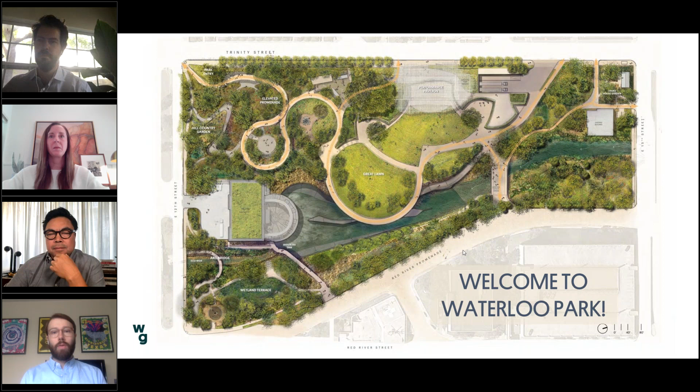It has a wide range of amenities in addition to hosting events, obviously. The park will include gardens, playscapes, an amphitheater with a capacity of up to 5,000, and other more immersive natural experiences, along with about a mile of trails.

It also gives you a sense of how centrally located this is. The capacity for the largest events would be up to 5,000, so a pretty substantial event or gathering could happen in this space. We look at this as an opportunity for a wide range of events, from contemporary music shows to ballet and arts, as well as gatherings like runs or other events.

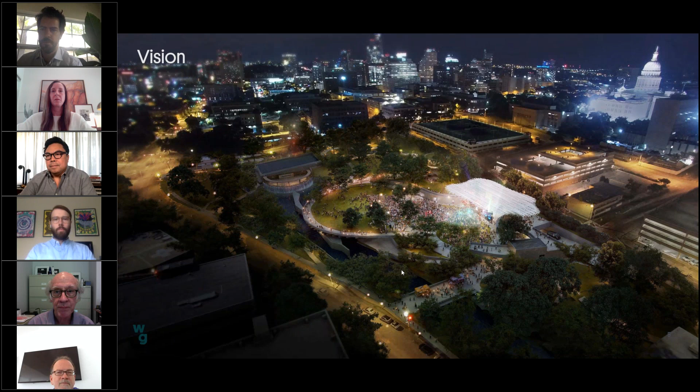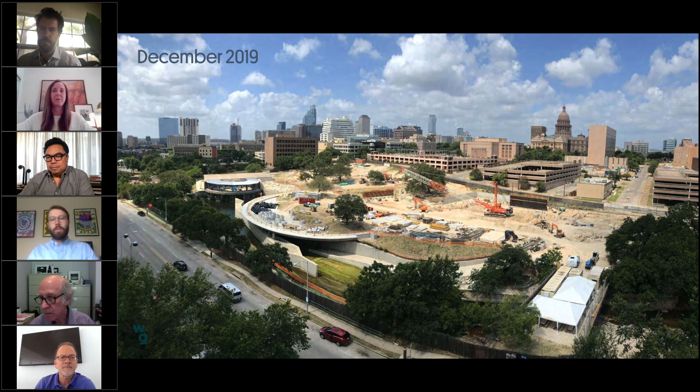One of the things we tried to do is build in permanent infrastructure to support the events, activities, and family uses of the park. The family pavilion is one of those structures. The others are these concrete buildings you see here.

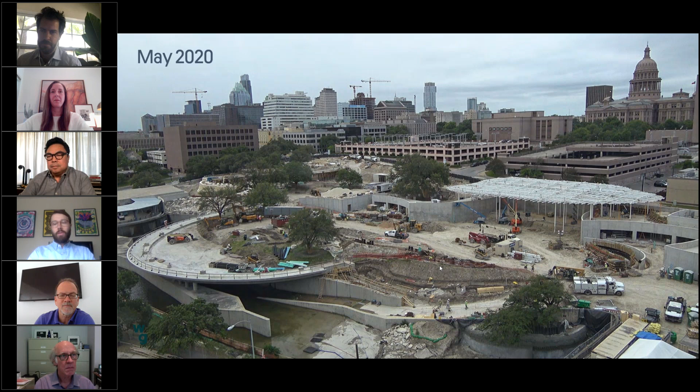One of the goals is to make those buildings really integrate with the landscape. In the case of the building you're looking at here, a lot of the facilities are underground with green roofs on them, and you really experience them as these beautiful curved walls. That'll have restrooms and concessions to support the larger events, and those can be closed off during non-event times. You also see, again, that central location with the Capitol and the city just in the background there.

Next, please. All right, I'm going to walk y'all through some aerial photos of the site and set some context for the family pavilion presentation. We'll quickly take a drone's eye view around the site and show you all the latest. Next, please.

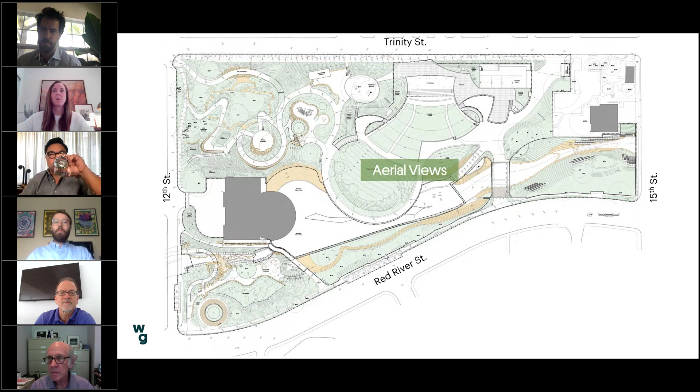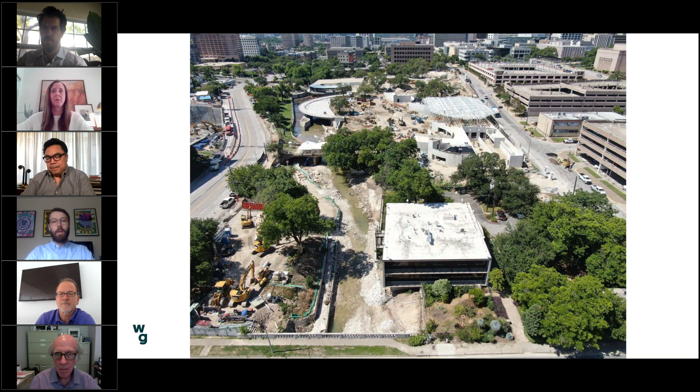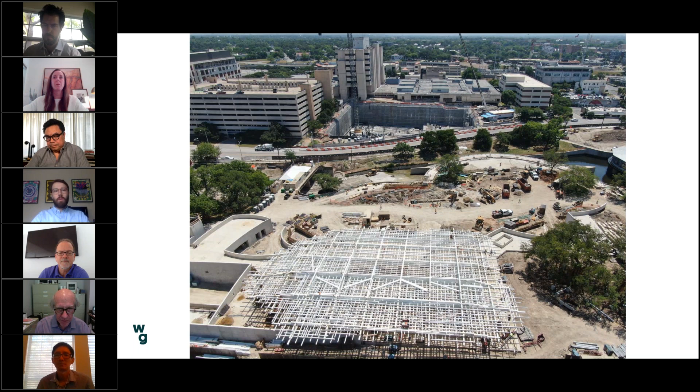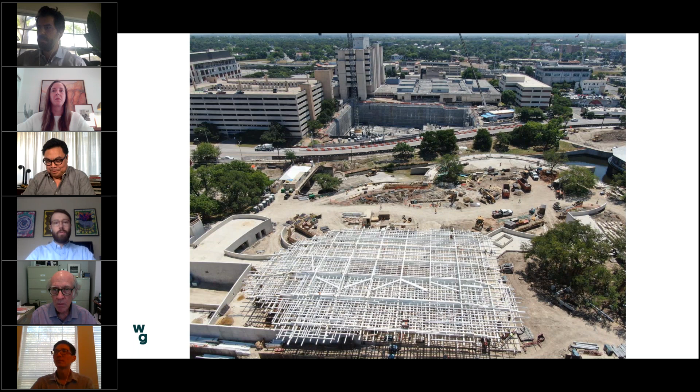Here's a view over top of the amphitheater looking out towards the Great Lawn. We've got about 5 miles of steel in the roof of that structure, and you can see all those layers which create that shade. There'll also be a rain protection layer, which keeps performers and attendees dry during a show. But during regular park use, that'll be a space where park goers can walk up on stage, hang out, maybe sit at some cafe tables, and use that beautiful shade canopy.

You can also see the development happening all around us. Just across the way, you can see the redevelopment of Central Health and the Innovation Zone.

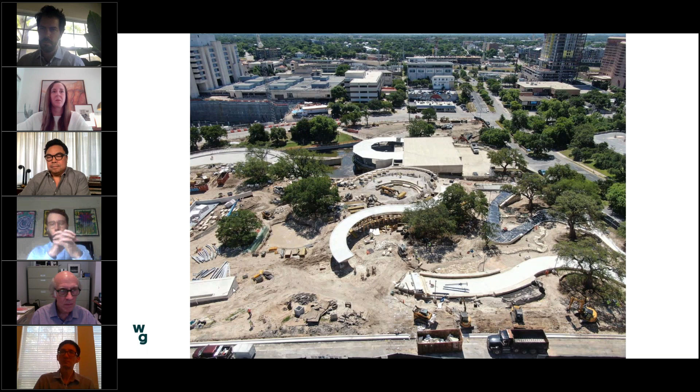This next view is looking from the southwest corner out across the park. Again, the trail curves through the park, with the Family Pavilion in the top left, in the canopy in the background. I like this shot a lot because it shows the beautiful heritage trees we have on site that we worked around with the design.

It's a key feature for us. We relocated 4, soon to be 5 heritage trees on site. One of the real benefits is we have this great day-one shade - we don't have to wait 15, 20 years for trees to grow for people to experience beautiful shade. So we built a lot of seating areas, trails, and other spaces which really benefit from shade in and around these beautiful trees.

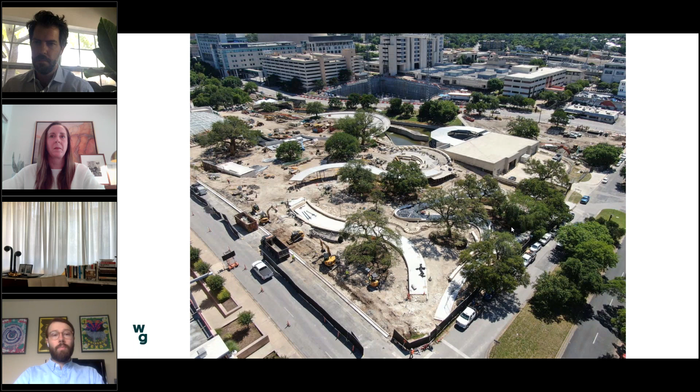Perhaps the 2 most beautiful trees on site are right adjacent to the Family Pavilion. We'll be talking a lot more about the design and how those trees work well with the design of the building over there, but those are some of the best trees on the property.

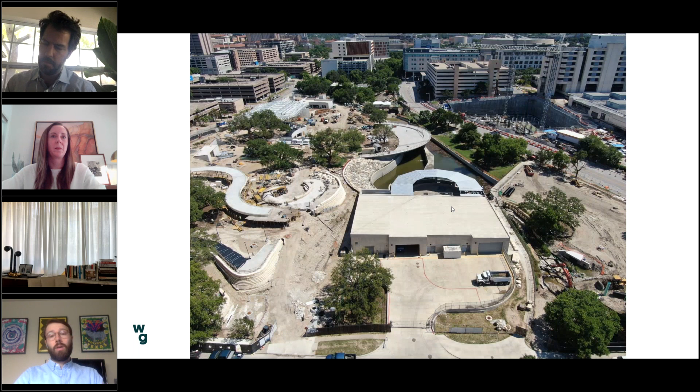Another one of the distinguishing features on site - this is looking from 12th Street north. You can see the medical school and UT off in the distance, but we have this large piece of tunnel infrastructure, the tunnel inlet facility. Any of y'all who attended our presentation last week got a lot of really great in-depth information about how the tunnel functions and operates and what it does to benefit the overall Waterloo Greenway Park system. This is sort of the central facility for that tunnel, and it's key in the center of the park - we've designed around that a lot. I think there'll be some really cool opportunities as the park opens to engage and learn about the great function and benefit it provides for the park system and our community as a whole.

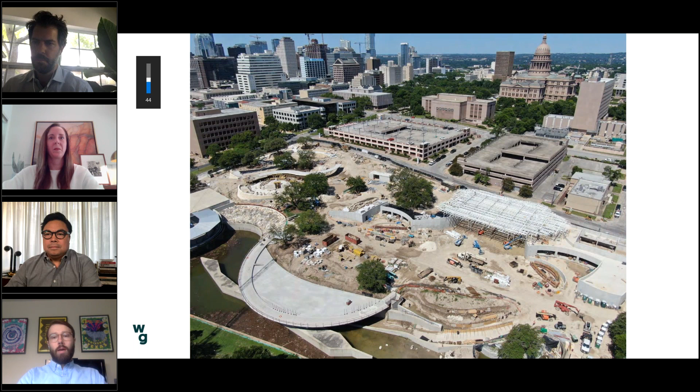And that moves us to today's focus, which is the Family Pavilion. So two of the trees that I mentioned are these beautiful existing heritage oak trees that have been in the park for generations, and before that as it was a neighborhood. Those exist right in the center of the park on the west side.

When MVVA, Michael Van Valkenburgh and Associates, was designing this park, this was seen as a real opportunity to utilize the shade around those trees to provide places for people to sit, relax, eat, and enjoy the park. With that idea in mind, we worked with Michael Hsu, Office of Architecture, to design this great concept of the family pavilion in this location roughly highlighted in blue here, which will serve a number of key features for the park at all hours of operation and be a great companion to the garden spaces, the amphitheater spaces, and other items I mentioned, including a playscape.

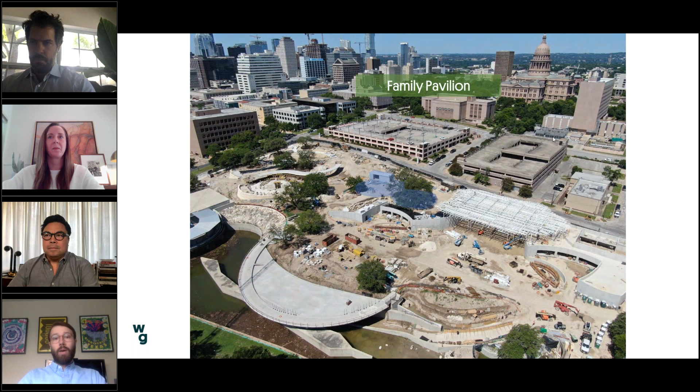And so with that, to talk in much greater depth about the family pavilion, I'll pass it off to Michael.

Thanks so much, John, for that primer and introduction. This has been an incredible job for us, and we're so proud to be working with you guys and collaborating with MVVA on the entire project. With me today I have Maija Kreishman, the managing partner of our office, and also Andrew Bell, senior associate and project lead for us. Andrew's been doing an incredible job making sure the project gets built out. We can go to the next slide.

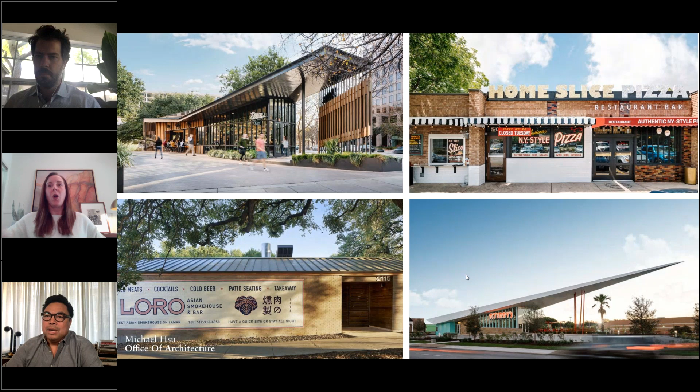I wanted to start by talking about our inspiration, where our hearts and minds were at on this job. But before I do that, I wanted to give a quick introduction to our office. We're Austin homegrown, about 50 architects and interior designers, and you may know some of our jobs, like the ones on the screen. There you have Home Slice, Loro, and P. Terry's. Those are some of the places you may know around town, but we've also completed projects like the South Congress Hotel, the Line Hotel, and Fairground downtown. We're big believers in placemaking and designing for a memorable and sticky experience. So that's why this project for the family pavilion was such an enticing job for us.

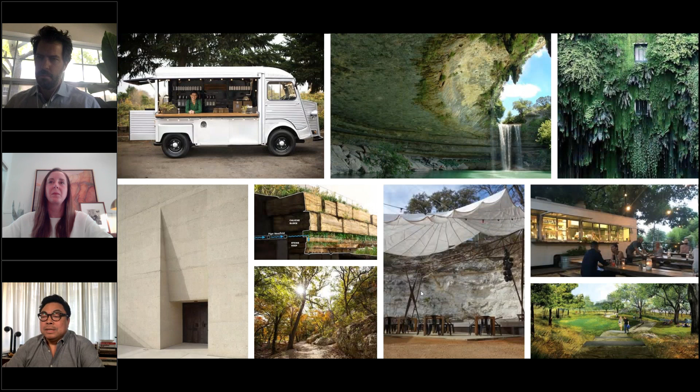So moving on to inspiration. What we love about nature, especially Central Texas nature and its topography and geology, is a contrast of experiences. So you have this classic photo of Hamilton Pool. And the way we're reading this photograph is we love the idea of materials that are very solid, really grounded, contrasted with the softness and texture and changing scenery of vegetation. So this project is really about those two things working in unison.

And we also love some of these images where really hard, heavy materials like limestone, or in our case concrete, were thought about and designed in a way to where they could almost float, because we love the idea of light coming through those two things as a screen and making for a really interesting experience. It was also the job of this building not to overexert itself, so we didn't want it to be over-designed. The park is beautiful. It's really about gathering and reconnecting with nature and less about architecture that's a little bit overdone.

So I hope you'll see that the building is meant to be quite subtle, with lots of interesting nods to how we bring light into it, so these contrasting experiences and textures will render in the final product when all the landscaping is grown over the building. It was really meant to tuck into the hillside and be a supporting cast member as opposed to being front and center.

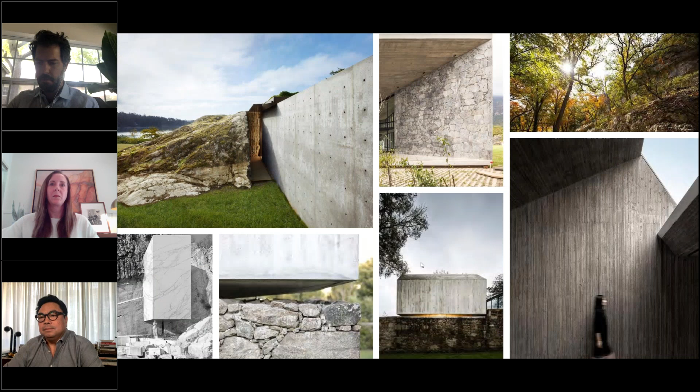Here you get some inspiration images of those contrasting things we were talking about, how the natural stone of the site versus the more man-made elements of the cast-in-place concrete, with the vegetation, and then having the sun really put it all into play as the catalyst. These are the things that inspired us for the job, and these are the experiences we hope to build in.

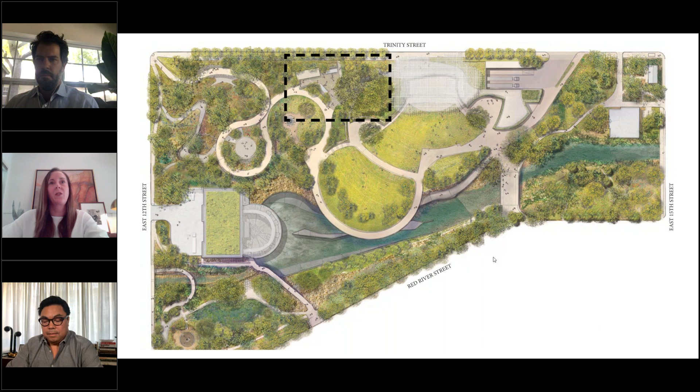We have what might be considered a small part of the project, but one that I hope is doing a really big service to the project. As John oriented you, the Family Pavilion sits just off of one of the main entries off of Trinity Street, right next to two of, I think, the most beautiful trees on site.

Its real intention here was to serve that accessibility goal. So we did start a lot of studies, as you know, with Waterloo Greenway, and talked a lot and listened a lot. Did this want to be a real restaurant? Did this want to be this or that? And we really came full circle to say we wanted this to be a really accessible part of the project. And so for us, that meant several things.

It meant the presence of food trailers, which do many things. I think it's something that Austinites really love. I feel like it's one of those things that we can claim as being an Austin first, maybe in many ways. But more importantly, it allows accessibility to different price points of food. It allows different restaurateurs to come in and bring different cuisines to the project. And it brings a certain casualness, so you can come and get food with your family, dressed up or down, and all the above.

I think most importantly now, even considering where we are, is that the food is really feeding outward. This was an intention of making sure that the food could really be carried throughout the park and be accessible to the beautiful heritage deck or down to the family play area and all of the above. So the main part of the project does include a courtyard to contain two food trucks.

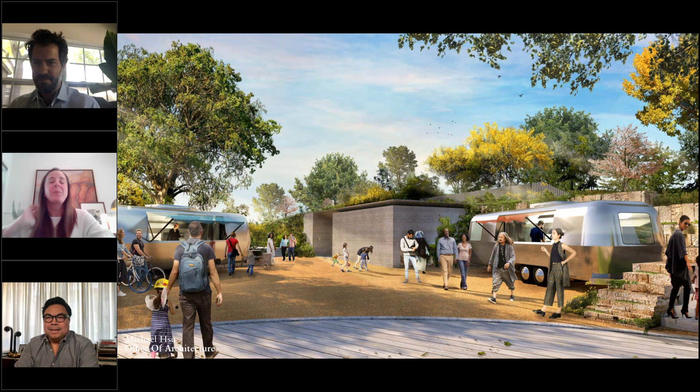Sorry, I'm having a little bit of lag, I apologize. So really quickly, just to orient you on what is inside, this is just a 900 square foot building, so not a huge space.

But again, it has three unisex restrooms. The main focal point of the project, really what you'll see in the renderings, revolves around a central sink. You'll see in some of the inspirations, we wanted that really to be an elevated experience where it could be one that's shared, but it shares even planting and all of the above. We'll talk a little bit more about that here in a second.

But then again, we just needed some things like storage and places for trash to make sure that the restaurants could really function and just be celebrated as that. And then here's the design.

Our main goals here, as John described and Michael as well, were that there was a lot about this building being a quiet component of the site, that it was really integrated into the landscaping and into the natural grade of the site. But we've always been asked, especially by the Waterloo Greenway team, how can we make every experience feel designed, that design can be for everyone.

And that even something as simple as washing your hands can be an elevated experience. So we really owned the material palette of the rest of the park. We enjoyed working with Thomas Phifer's office, and they had celebrated such a language of concrete.

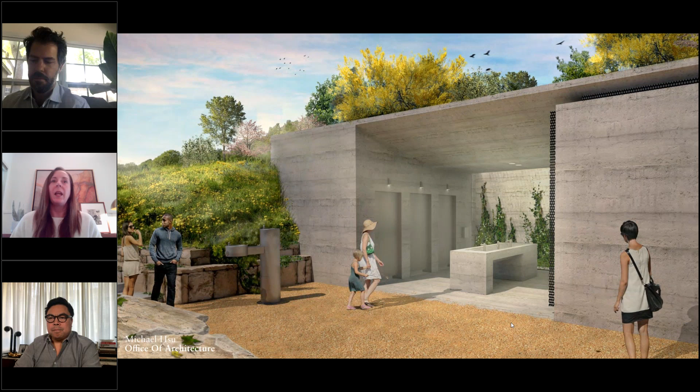And then here's a view looking at the heart of the family pavilion, which is designed around this kind of vessel sink. We were inspired by almost some primal or even religious baths, but it's a cast-in-place concrete sink. There's a little bit of, for you architects on the line, a Carlo Scarpa inspiration. It sort of steps down, but it floats as an island, so it can really service all.

And then at the backdrop, we bring in the landscape to the building. There's a skylight at the top that really grazes the beautiful architectural concrete walls, and then plants can sort of come up. What we love about this is that this building will really change with the seasons, and hopefully it seamlessly integrates with all of that.

The last feature, which we designed obviously before a lot of this happened, but we wanted to make this super accessible to families. So in addition to the program inside, we have a hand washing and drinking water station outside the building. That was really intended to make sure that moms and dads and kids could go play around, get a little dirty—that's the hope here—and then get a drink of water or wash their hands off really easily. There's enough room for strollers and all of those things, so that this really becomes a place and kind of the heart of especially a lot of the family activity of the project.

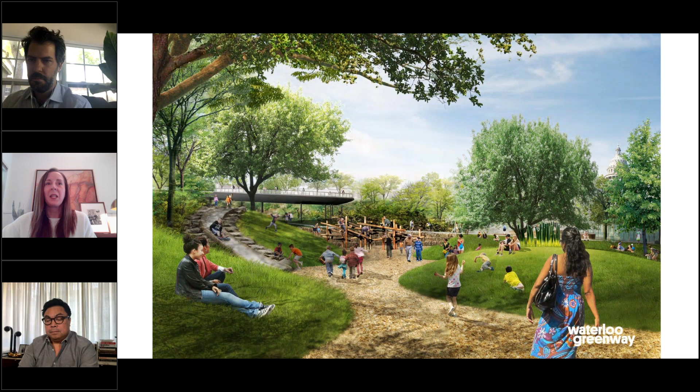And I can't wait—I don't know if they're going to let adults go down this natural slide, but I hope so. So we can ask Sean about that afterwards.

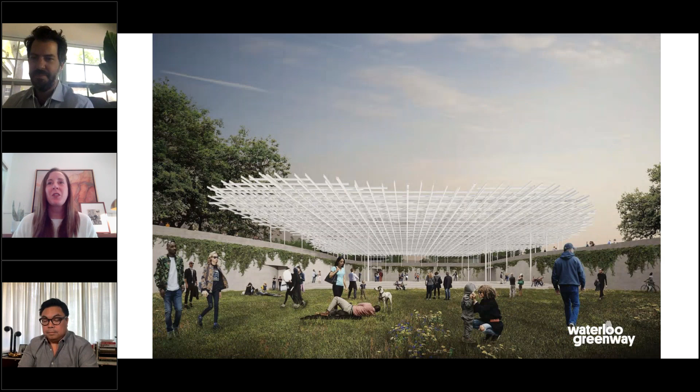And then, wanted to retouch on—again, we know that the star of the project really is the pavilion piece. But we were really inspired by the way that Thomas Phifer's office utilized this beautiful concrete as the anchor into the landscape, and then this kind of white cloud of a roof to hover above. So our building is a little bit in support of that and letting this be the star. But we were really trying to tie the high caliber of design even into our smaller building, tying together the design features as a whole.

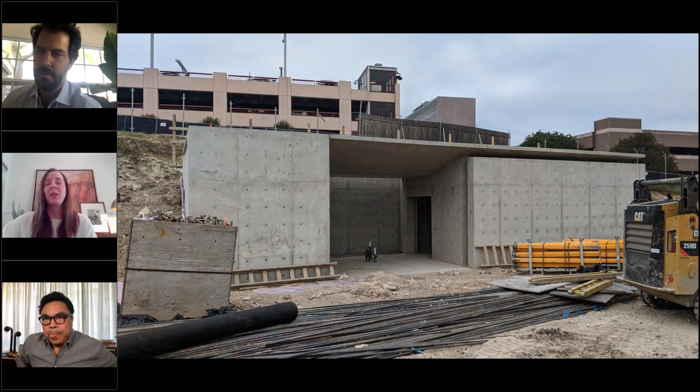And with that, I will hand it off to Andrew Bell—this building might be small, but it is quite complex. We would love him to show you some construction photos and talk about how it's coming. Thanks, Maija.

Hey everybody. So this is a photo from just a few weeks ago. We actually had our roof pour three weeks ago, so you're seeing a recent photo. The sink hasn't come in yet, the steel components aren't installed yet, but we are seeing where all the concrete has come to fruition. The real straightforward simplicity of this design vision that the team put together—it took a lot to execute and integrate all of those systems and make everything seem as seamless as it is today. So it's been a great opportunity, a lot of fun for us, and a lot of working through all those details to make sure everything comes together and looks as seamless as it does.

Early on, we had to work to coordinate everything to be hidden and concealed. This is a building that you will see from multiple sides and even from above, so it was important to our team to keep even the roof really pure and just a concrete structure.

From this view, you're at least seeing a little peek of that skylight beyond and that extremely thin blade roof that we were really happy to see the construction team was able to execute fairly well. It's such a tight geometry that the formwork and complexity of getting that to pour consistently required a couple of different pours, but I think we did a pretty good job working with the team to find ways of concealing the joints between pours and making the final object appear as a single piece.

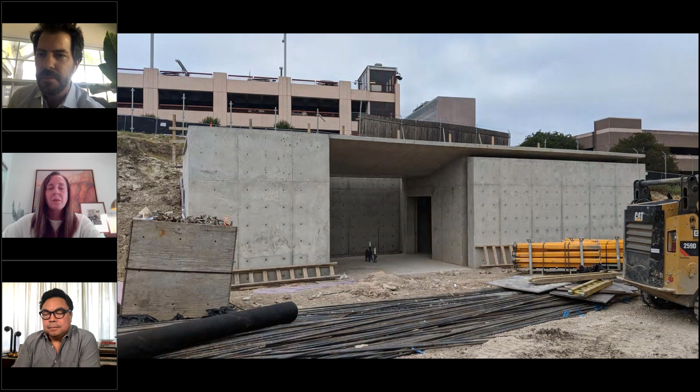You can really see in this image how the building tucks into the landscape and deals with the challenge of grade in this project. From Trinity Street, you won't even really perceive this building. You'll only see the garden and the park beyond.

It'll tuck away and be hidden, but then for patrons within the park, they happen upon it and see this really beautiful moment unfold. There's some messy construction debris around, but in general, the execution of the concrete on the exterior has come out really great. We're super excited about the progress.

You can kind of see some of the geometry that wraps around to the backside of the building that wasn't apparent in the rendering, that datum that follows around and brings in natural light and allows for natural ventilation, carrying to the backside of the building as well.

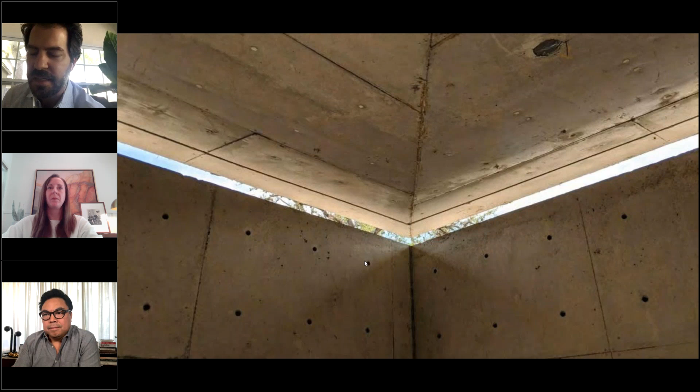This is standing inside the building. It was really exciting, even on such a small building, to be able to create these really dramatic moments on the inside of the spaces.

We loved being able to think about sustainability and passive ventilation, and at the same time think about these handful of moments where we could bring light in a dynamic way, to make every experience in the park seem like a high design moment. This is standing inside the restroom facility, looking at one of those corners where that blade roof floats and cantilevers and transitions at the corners pretty seamlessly.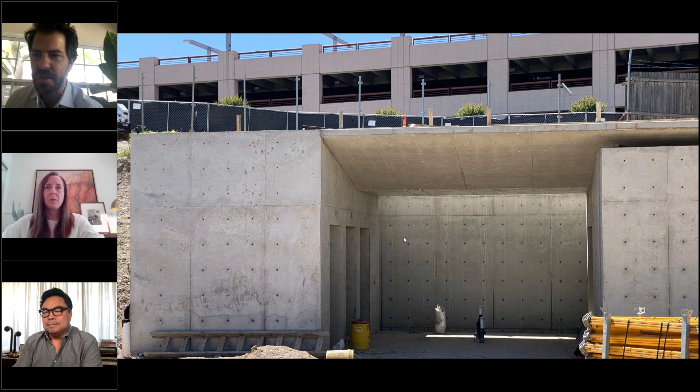I think we have one more slide of construction photos. This is a great photo because you can finally get a sense of that heritage deck beyond. Those are those really beautiful trees John was talking about at the beginning of the project, a place for people to go after stopping by the restroom, stopping by the food trailers. They can wander over there, and there's some seating areas beyond.

We love how this sits within the larger context of the park and can play maybe a minor supporting role, but still one that ties into all the other great experiences that people are having.

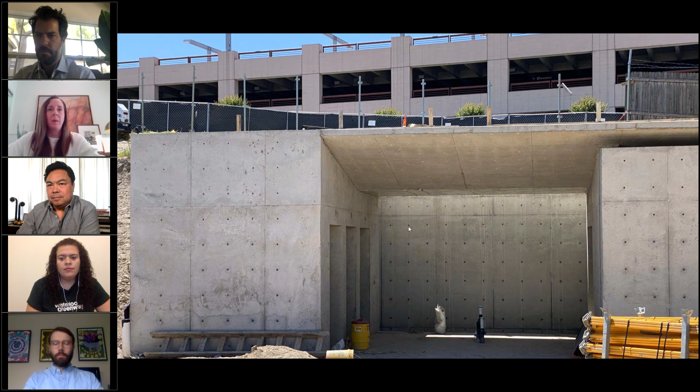Yeah, I think we studied a lot. Maybe I'll back up here, the area in front, making sure that it was spacious enough for lots of strollers and families, and that kind of hand washing experience. I think the other thing I will note is that we are also using reclaimed water, so we're staying true to a lot of the green values of the park as well. But we really felt like the space in front of the building was just as important as making sure that the space within felt great.

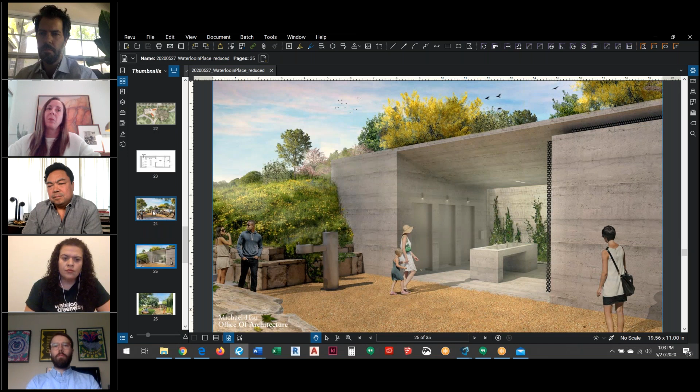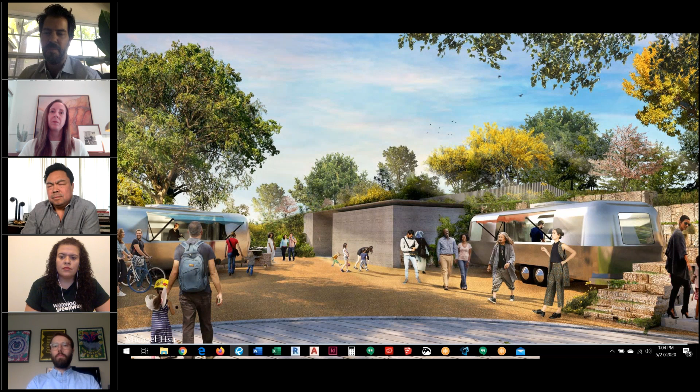I think it was important to our team also to make sure everybody felt safe and secure in the restrooms. We didn't want to just create a pavilion that was so open that people didn't feel safe at certain times. So we really wanted natural daylight, plenty of lighting and plenty of privacy provided to people going in there, and then providing a security gate that is kind of hidden away but can be pulled out to secure the space if during certain times we don't want people going in there. So security and safety were a big part of our thought process during the design phase of this project.

Yeah, that's great. Thank you for that. We also have another design question about the roof and if it will be vegetated.

It actually will not be vegetated. This is one of the few roofs in the park that is not going to have a green roof. The team did talk about that quite a bit, and in the end what we decided to do was to just make it like the rest of the building, super pure concrete geometry, and go for exquisite execution on that end and have it just be the complement to the landscape around it.

Yeah, I think it's also worth mentioning that there's a lot of new planting just behind the pavilion as well, so that the pavilion is really meant as a foreground element with the lovely new plantings that'll happen right behind it. So it will feel very integrated without having to go to a green roof, which added thickness, complexity, and maybe an element that wasn't necessary.

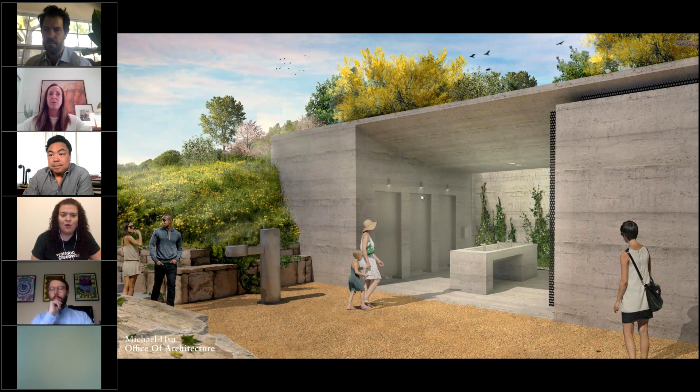Yeah, and that's something that's unique to our park - the topography, as has been mentioned previously. Can you tell us a little bit more about that? We have a really good view here with the rendering where you see that vegetation coming over one of the sides.

Sure. We had a lot of fun with this - a big chunk of this building's pure function was actually just to retain land, to create space. So we're using the concrete for that, but really celebrating it into something occupiable. We like the idea that the building can seamlessly integrate, and that there's something about the pureness of the architecturally formed material versus the wildness of the landscape next to it. That's a lot about what Michael talked about in our initial inspiration - that tension was really interesting, that you could make something quite beautiful and pure next to something that has a mind of its own, and that's the beauty.

Absolutely. And we have a question. Melissa, sorry. Yeah, go ahead.

One other thing I was going to add that's an interesting element is the plants coming up in the skylight area within the restroom. One of the things we talked a lot about was how to make a bathroom feel more inviting and more like a public space, bringing in greenery and opening it up so you have fresh air and light coming in makes it feel less like you're being pulled into a dark restroom and more like an extension of the park space. The building itself is really successful in connecting those things, and that moment indicates this is another part of the park and you're welcome to go in here. It's not like you're quickly rushing into a bathroom and rushing out, which is often the experience of smaller restroom buildings. So that's a really exciting element where the landscape comes in as well.

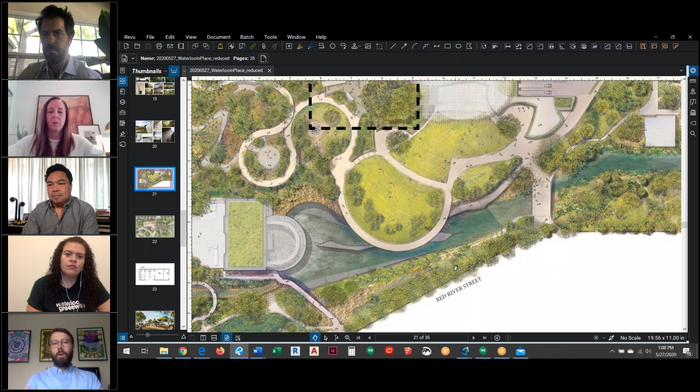Sure. This is a good time to talk about some of the public engagement, which got us here too, which is very important to talk about. Since before this park was even reconceptualized by Waterloo Greenway, there has been a public space around these trees. It's been a gathering space with events and some facilities, water fountains - there were some bathrooms there. It's because these trees are so wonderful and provide shade in a really hot climate. So the design team looked to continue that, but in a way that was more sensitive to the tree's health and better connected with the amenities throughout the park.

Through that process, we lowered the deck significantly. The deck used to be elevated and up in the tree canopy, and we built this deck right on the entry sequence from Trinity Street, as Maija pointed out.

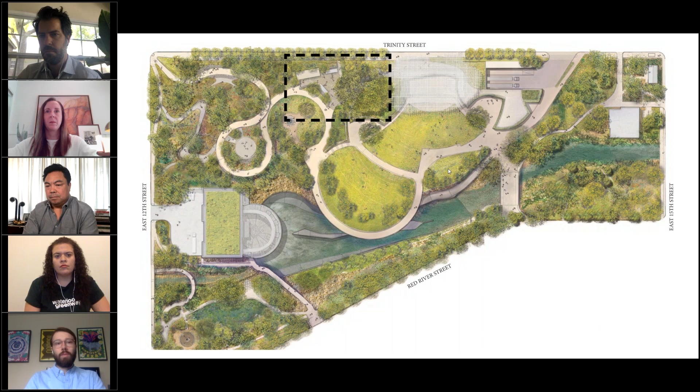That deck will really serve as a seating area - we'll have movable seats and chairs where people can eat lunch or just hang out and enjoy themselves. We may also be able to do certain programs, like you could imagine a yoga class taking part on that big, beautiful deck under these trees. The seats are mostly mobile because of that, but it'll be a great eating area for when we have the food trucks. This was a great community engagement opportunity for us, and really a lesson learned about what our community's needs are regarding food.

Michael Hsu's office was part of long discussions with us about what goes here in terms of food service. Originally we started with some really exciting concepts for a cafe - a physical building in the park. You see these park cafes all around the country and the world, and they're really beautiful opportunities. But when we went to the community and really engaged about this, what we heard was those cafes are too expensive for me, and they don't feel as inviting and accessible as Austin does.

And so we took that feedback and looked at ways that we can make this feel more inviting, flexible, and accessible. And when we talked more about that, it wasn't just about the price point of the food to the park visitor. It's also about the types of operators that can have access to partnering with us in these spaces. And so that really steered us towards this food truck concept.

Not only can we lower the cost of food for park visitors, which means more people will eat here and spend full days in the park, which is what we want, but it also means the number of operators in Austin who could potentially operate a food service here multiplies times dozens or hundreds. That's really exciting to us, as an organization who can provide those opportunities to great vendors who might not have the capital to fit out a large cafe building in a park.

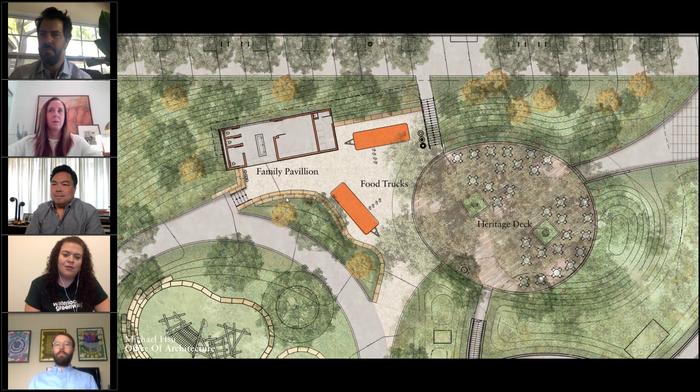Yeah, it's definitely a difficult time for all of our community right now. But because of everything going virtual, we've been able to do some really great tours with a lot of our partners. So it's been really great to have these more detailed conversations that we don't normally get to have. But when we are able, we'll be resuming our monthly on-site tours.